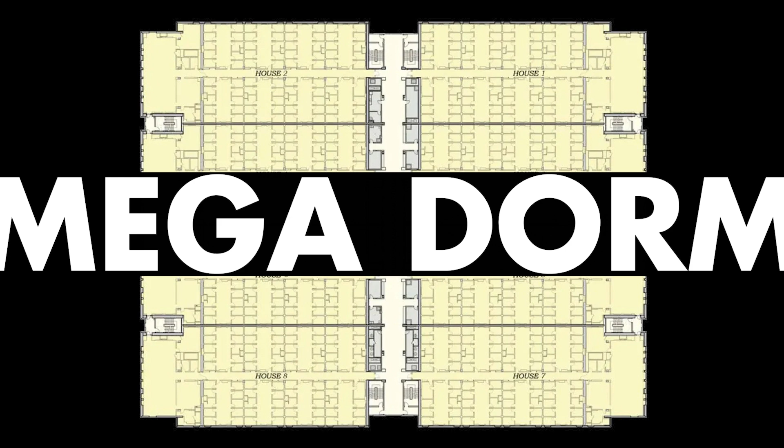The University of California, Santa Barbara faces a massive housing shortage, not just on campus, but throughout the surrounding community. Enter Charlie Munger, the now deceased billionaire and philanthropist, who with partner Warren Buffett ran Berkshire Hathaway, a $650 billion company. In 2016, Munger announced a $200 million gift to UCSB to construct a new dorm building, but also, as a hobbyist architect, he wanted to design it.

He spoke of a cutting-edge facility that could deliver world-class student accommodations at a significantly lower cost. And in order to achieve this, he would push for a design that maximized density and leveraged economies of scale. Now, of course, Munger wasn't drawing floor plans himself, but rather leading the conceptual design and enlisting architecture firm VTBS to work out the finer details of his vision.

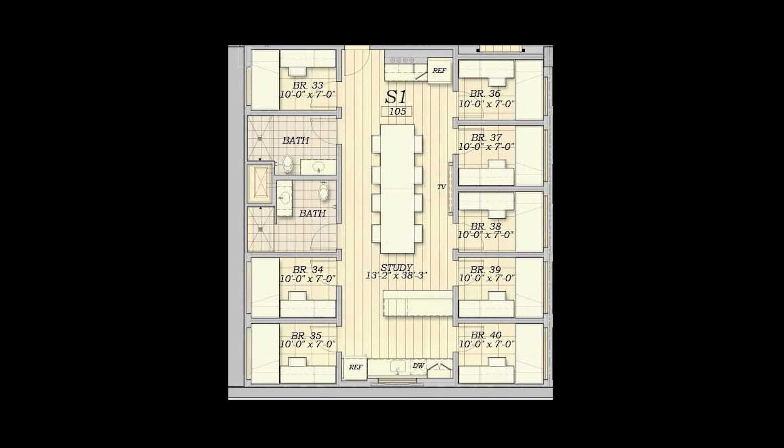In 2021, detailed design drawings were unveiled for Munger Hall. The 11-story building featured 4,500 individual bedrooms, which were Spartan. They had just enough room for a single bed and a desk. Most notably, the bedrooms had no windows. 8 bedrooms would be organized into suites, also windowless, which included 2 bathrooms and a communal area with a kitchenette.

8 suites would then comprise a house, which included a so-called great room, larger kitchens, and laundry facilities, and each floor would be comprised of 8 houses, which means that one level of the building could house an astonishing 512 students. 8 of the 11 floors would include residents, while the ground floor and the top 2 floors would be occupied by common amenities, including a courtyard, market, restaurants and cafes, gyms, a theater, lounges, and reportedly, even a Costco.

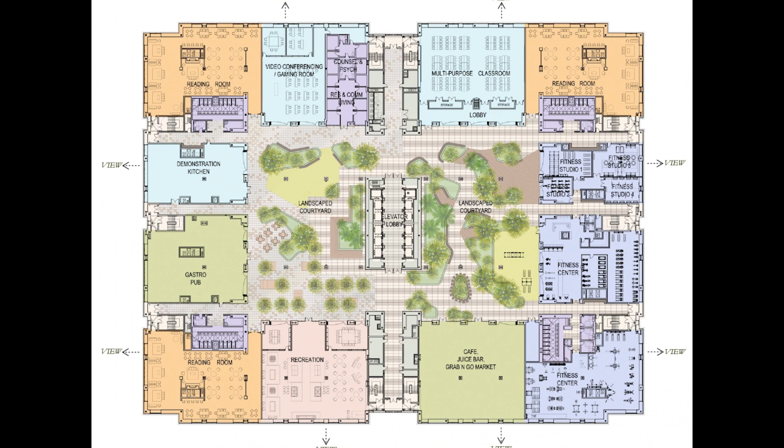Through this design, Munger Hall achieved an extraordinary level of density and efficiency. And it achieved this primarily by keeping the bedrooms windowless. To be fair, 6% of the bedrooms did have windows, leaving a staggering 94% without them.

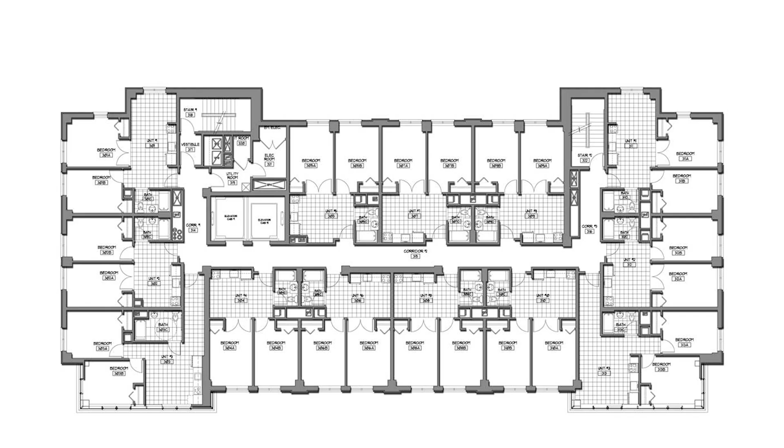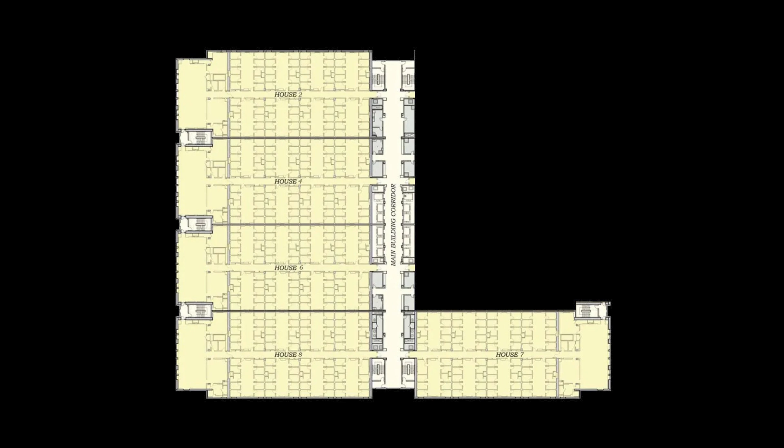This design decision runs contrary to virtually all residential buildings in the US. In traditional construction, a room's access to an outside wall is a limiting and even defining factor on the size and layout of a floor plate. So by the elimination of windows, Munger freed up the floor plate, and therefore could repeat his 8-room module multiple times over, maximizing the amount of usable space while maintaining a simple rectangular building form, minimizing expensive elements like the exterior envelope and roof. But at what cost?

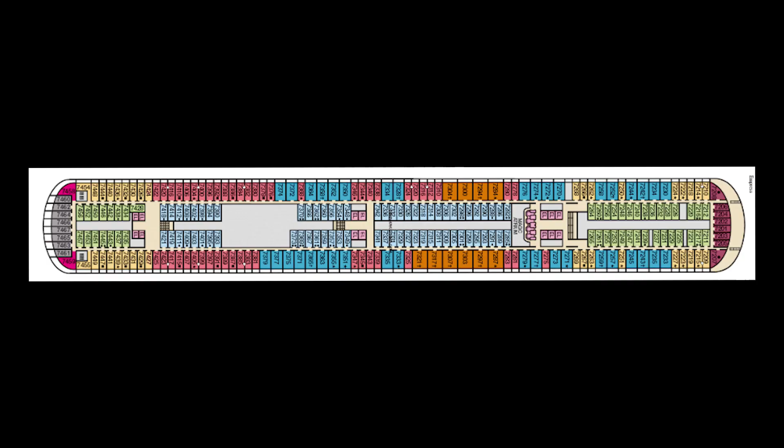Each bedroom in Munger Hall would include a so-called virtual window, an artificial lighting unit capable of simulating the circadian cycles of the sun. Munger cited an unlikely source of inspiration for this feature, saying, quote, 'So we just copied what Disney Cruises did. The way Disney does it, the window is really a television set.' Munger Hall takes another cue from naval architecture. Like cruise ships or aircraft carriers, where square footage is at a premium, the design minimizes individual sleeping quarters in the name of efficiency. Munger himself called it our version of ship architecture on land.

Munger Hall's design choices stirred instant controversy, becoming viral on social media and igniting debate around the country. Architect Dennis McFadden, who served on the university's design review board, even resigned in protest. And in an open letter, he called the project, quote, 'unsupportable from my perspective as an architect, a parent, and a human being,' going on to say that the building is a social and psychological experiment with an unknown impact on the lives and personal development of the undergraduates the university serves.

The debate raged between balancing the need to address the housing shortage rapidly versus the idea of a universal right to a certain standard of housing quality. Comparisons were drawn between Munger Hall and the tenement buildings in 1800s New York, where impoverished families crowded into cramped rooms with limited fresh air and natural light, in buildings that were prone to collapse and fire.

Today, most building codes require that natural light and ventilation be provided to all habitable spaces. However, as the university serves as its own jurisdiction, they have the power to interpret and enforce building code however they choose. Regardless of code requirements, natural light and ventilation have been a basic component of architecture throughout history, and connection to the outside world through our buildings has been proven to provide psychological and physical benefits.

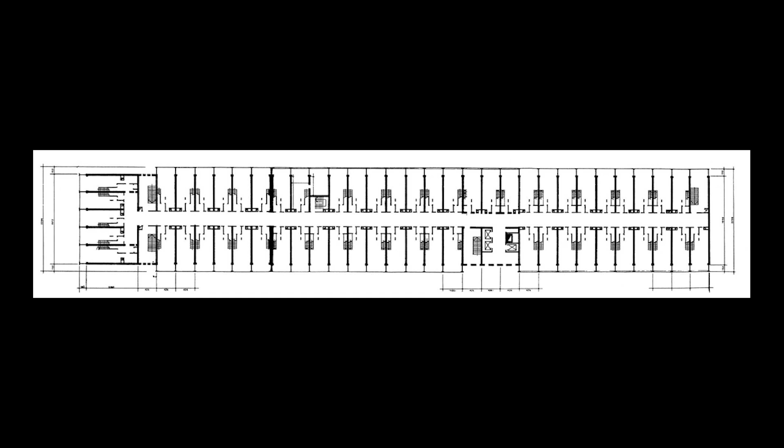There are countless examples of ultra-high-density housing around the world that still provide windows to residents. This is accomplished via long and narrow, or tall and skinny forms, or even via courtyards. Architect Le Corbusier's Unité d'Habitation was a groundbreaking project that sought an inexpensive way to house many people. Its long and rectangular form provided each unit with ample natural light, and even outdoor terraces. Even buildings like Soviet housing blocks, which many might describe as dystopian, provide the basic feature of windows.

After 2 years of public debate, in August 2023, plans for the megadorm were quietly shelved. The university later confirmed in a statement that they would be moving forward with a, quote, separate student housing project. And finally, Charlie Munger died at the age of 99 in November 2023.

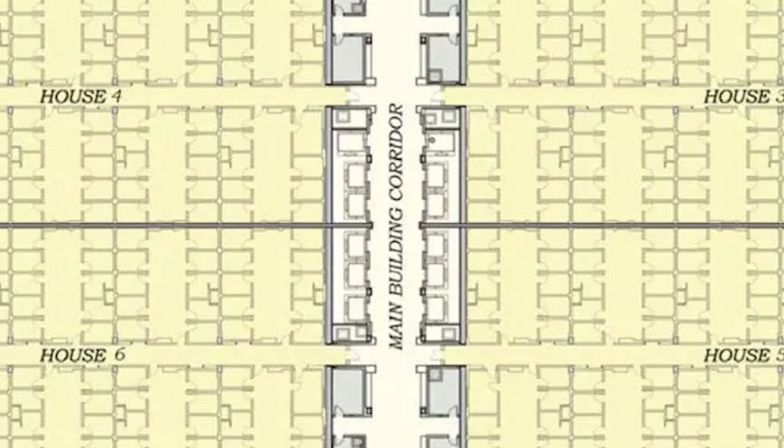In the end, Munger's vision was never to be, and perhaps that's for the best. In an era where it seems that the drive for cost savings is making everything just a little bit worse, Munger Hall may have represented a tipping point that inspired people to say definitively, this has gone too far. In the never-ending quest for optimization, cost savings, and efficiency, perhaps there are some basic human needs that cannot be sacrificed. And so, for now at least, we'll never know the real-world results of the bizarre social, psychological, and architectural experiment called Munger Hall.